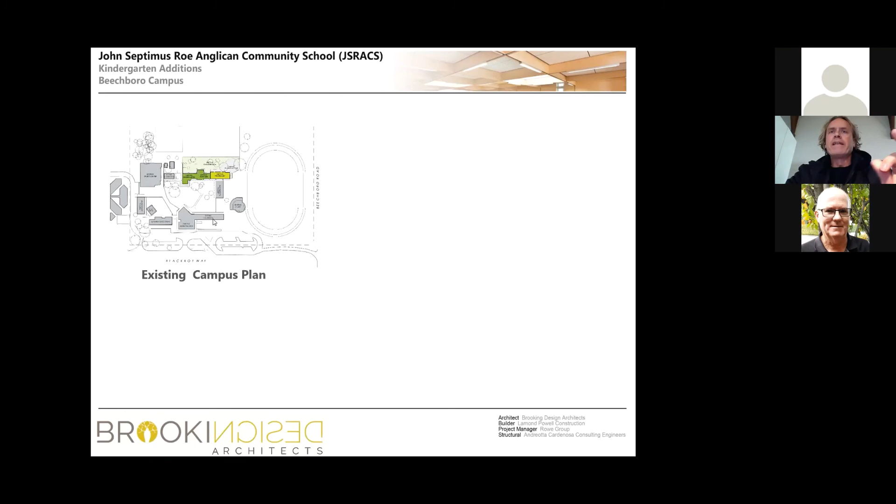as we could within that. But the overarching theme was to provide spaces that had a nurturing quality about them. So when you look at their existing spaces, you could argue quite readily that they were very uninspiring and unnurturing. So hence, looking back at it, the solution wasn't that hard to develop. So we have an existing campus. We looked at a couple of other buildings there. We did some analysis on converting them, but it just became expensive and we really couldn't get the solution out of it. So we came up with the ideal solution, which was really to build a new building,

to leave the old building stock there, which could be recycled. It made more sense to build a new building. Our budget for this project was $880,000. So that was the absolute upper limit that included basically everything. That was a budget that was given to us by the school board. So the first thought I had was, with the budget being that much restricted, how do we get a really, really simple building? The most simple building would be a square.

And we came up with an idea of encompassing these three children's spaces within one area, condensing the toilet block and the ablution area and the services to a simple core. So we ended up with a relatively square building, the core within one corner, and then this idea of an open space.

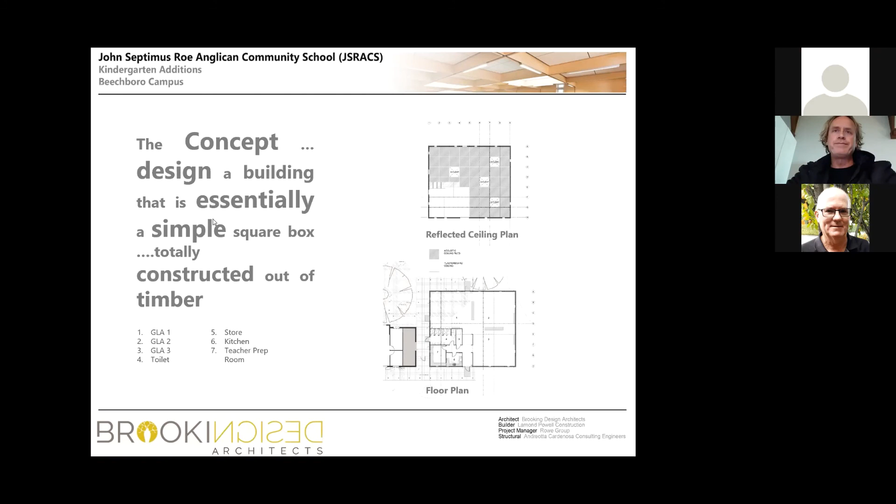Now, when we first proposed the idea of an open space for 3 kindy spaces, there was certainly some discussion about whether that was feasible with noise and noise control and all the rest of it. And then we embarked on this design development process.

So there's the spaces, and I'll just zoom in on those so everyone can get a better sense of what we're talking about. And the whole idea of this building was that it was set up on a grid. So it's set up on a 2.4 by 2.4 grid.

On those primary grid locations on the external wall, there is an LVL column, and it is then infilled essentially, gang nail roof trusses that run across in both directions, and then infilled with what I call double layer timber studding on the exterior. But the plan was extremely simple and really intended to be that way for a lot of reasons, as you'll see in the next couple of slides.

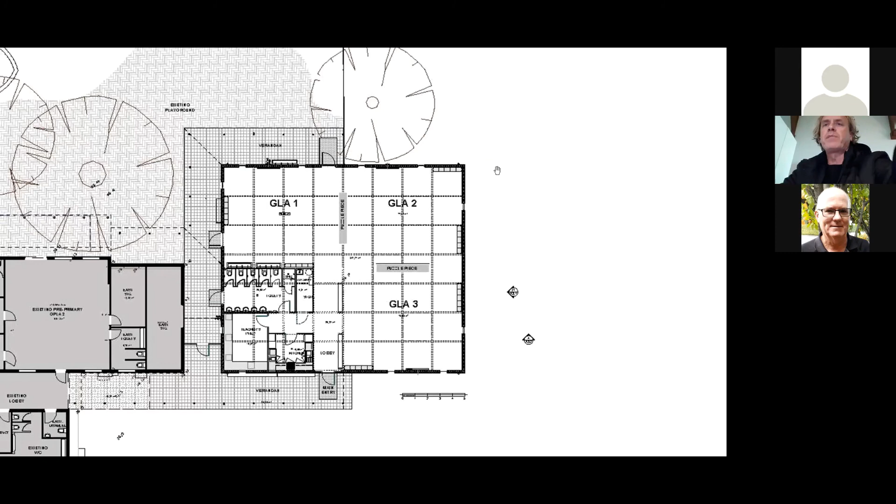So this was one of our preliminary, well, it was preliminary, it ended up being a final, but it was certainly one of our early concept drawings that we did to understand the space. And I remember literally going into the office one morning and saying to my guys, look, this thing is just not working. We had gang nail roof trusses, we had ceilings below. We were looking at this thing of gang nail roof truss being something that you would hide and it would disappear.

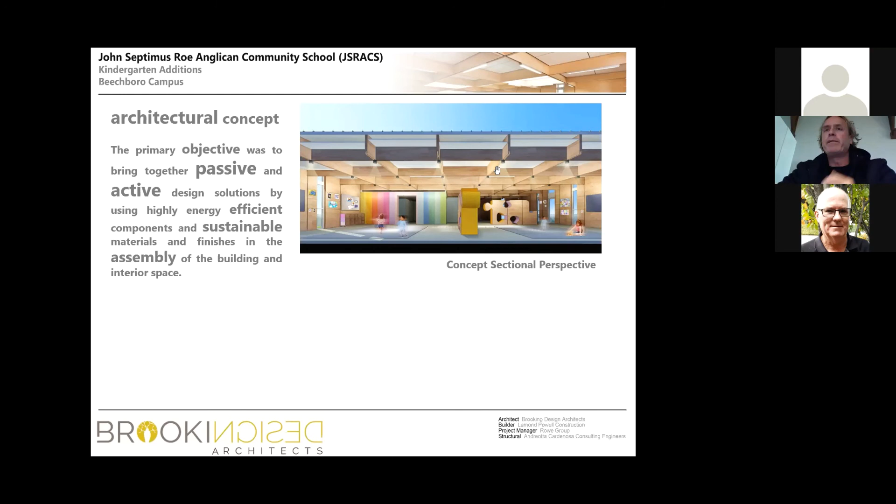And what happened was that we were literally putting ceilings through at 2.4 metres. And again, the space was uninspiring. We were using timber in a very conventional way. So I came in one morning and said, look, this is not working, but I've just got this idea. So I said to one of the guys in the office, just quickly model this and put material on the faces of these gang nails and see what happens to the space. And that became the catalyst for this design.

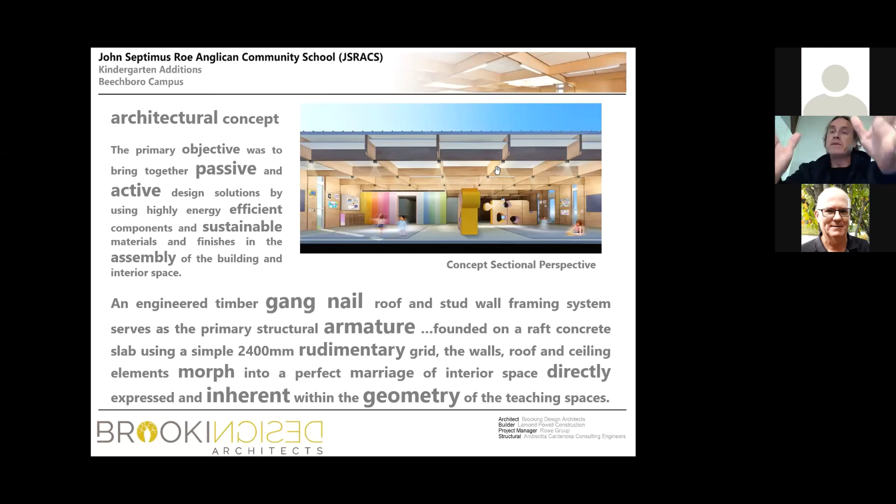So we ended up using these gang nail roof trusses, which were extremely economical. But the building system was really just a raft slab, series of LVL columns supporting the gang nails, and then everything was clad in ply. And the way we'd set up the grid, the idea was that we would not have to trim the plywood sheets. So the plywood sheets would come in at 2.4 by 1.2, and they would be delivered to site, and then everything would fit together as a jigsaw puzzle.

One of the unexpected things that came out of it is this little blank of colour in the background. A lot of the buildings I'd seen prior to this used primary colours. You go to a kindergarten and they'd put red everywhere and primary blues, just as a token sense of putting colour in. But we wanted to really restrain the use of colour so that it became almost like a peel away, like when you peel away an orange and you have a reveal to it. So we put this spectrum of colours against the wall, which was quite clever because we ended up winning the National Dulux Award for just that wall, which is literally only 6 metres long.

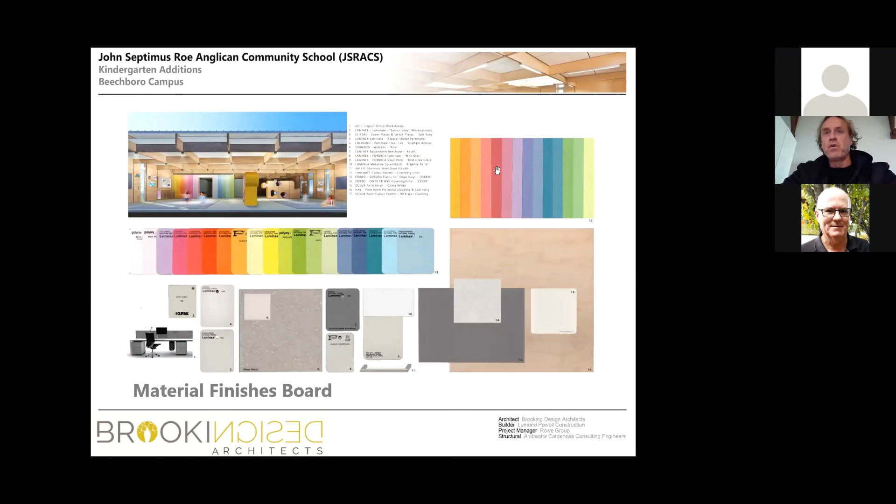So then I came up with this idea of puzzles and how could we incorporate this idea of a puzzle within the shape and things. And we started testing some of the ideas around furniture. So furniture to us, or storage elements within the space, should be flexible. There shouldn't be anything within a classroom which is rigid and fixed, because spaces evolve and you really want to give the teachers and the students the opportunity to reconfigure spaces as they wish.

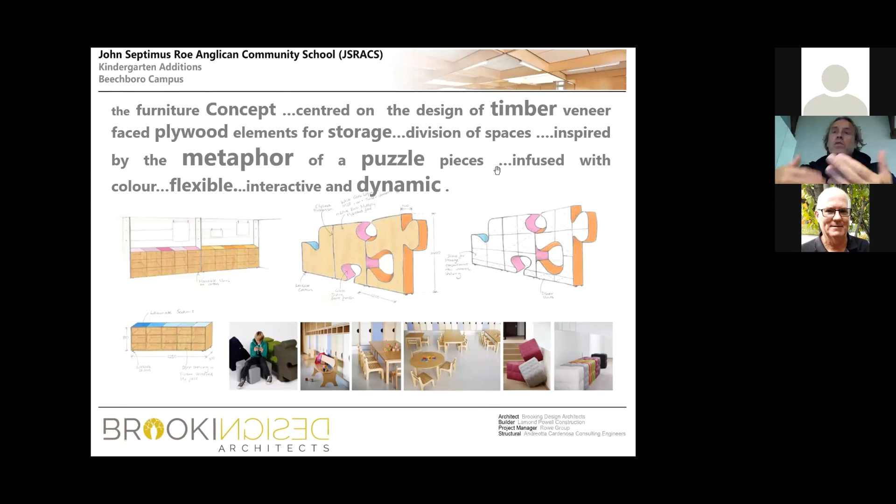So what we did was we came up with these quite unique storage elements that then became dividers, which also by default became play spaces for the children as well.

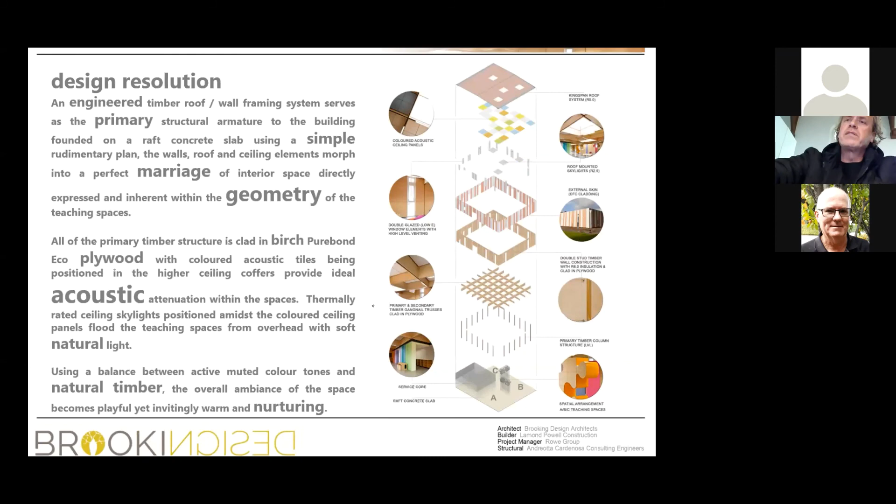Okay, so this is my go-to kind of sketch, I suppose, because it sort of reveals the simplicity of what really this building is about. And I'll try and zoom in a little bit so everyone can kind of see it. So we literally just have a raft slab, 100mm raft slab that sits on the ground.

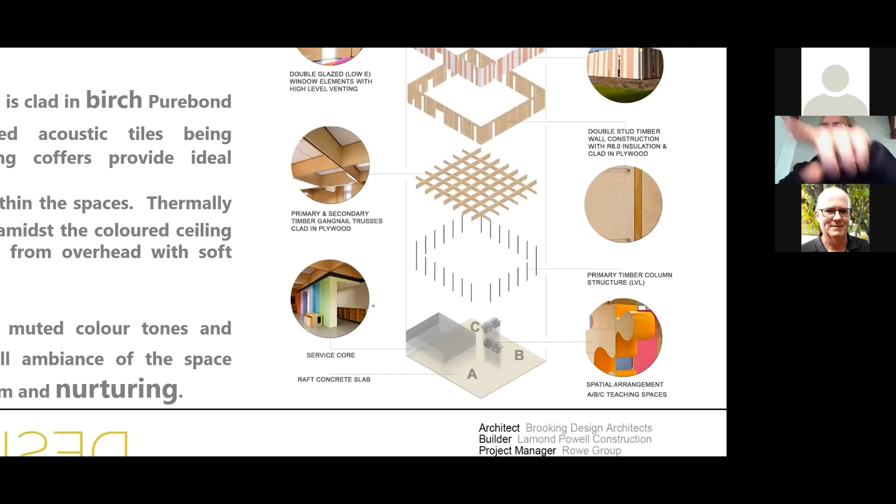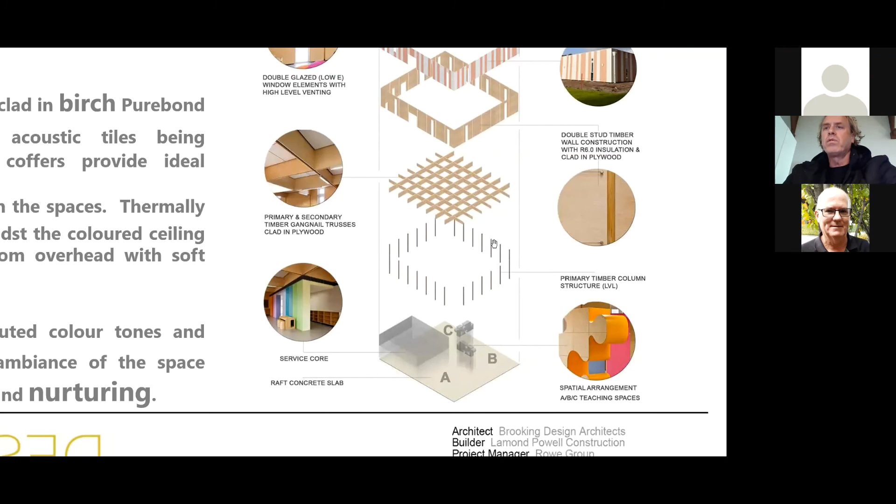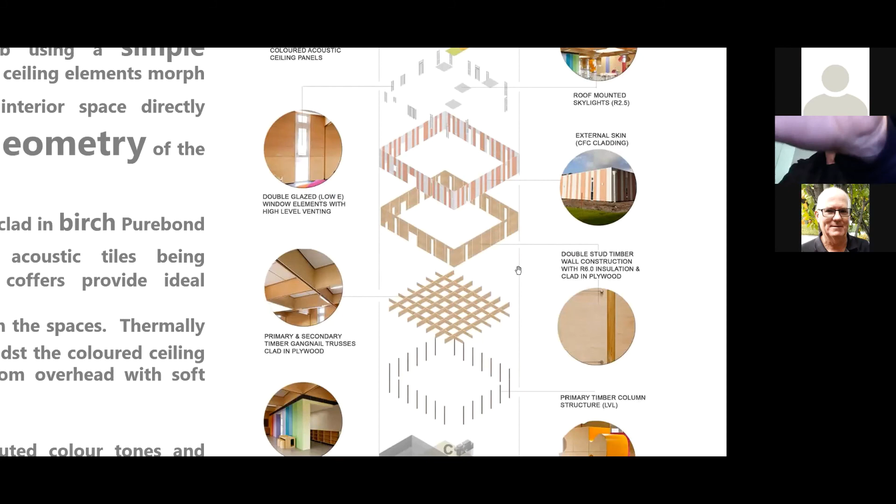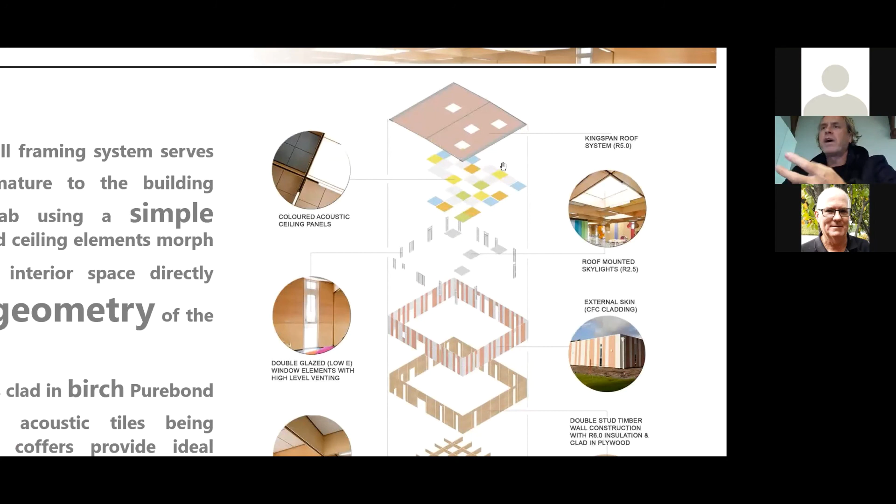In one corner, you can see there is a service core, a series of primary timber LVL columns that sit in the wall surfaces all the way through. The trusses that sit in two directions, a primary direction and then sort of secondary ones infilling. Timber framework, which I'll talk about in a second, cladding on the outside, some very restrictive glazing, which was double glazing. And then this idea of these ceiling panels that acoustically attenuate the space.

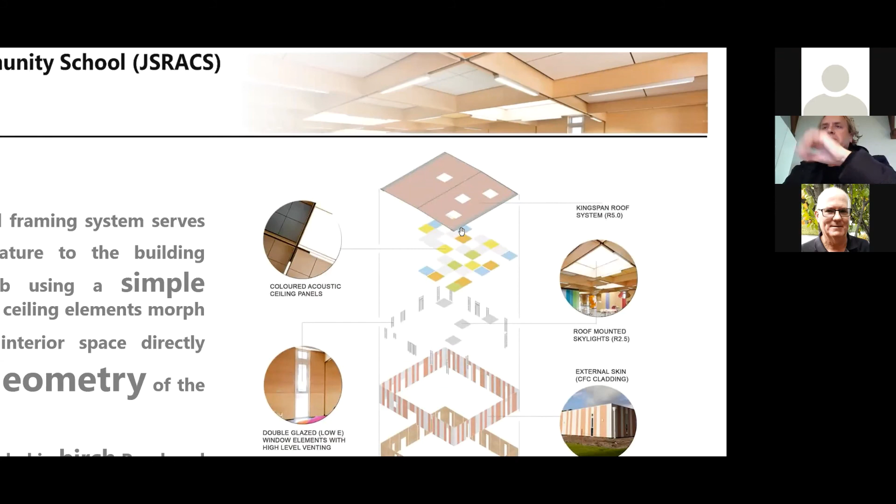And my kind of go-to roofing material, which was a Kingspan product, which has got an amazing R value, and you can create sort of an airtight type ceiling of the building. Skylights at high level. So one of the things you'll see in some of these images I show you is that there's this beautiful sense of natural light that permeates the space.

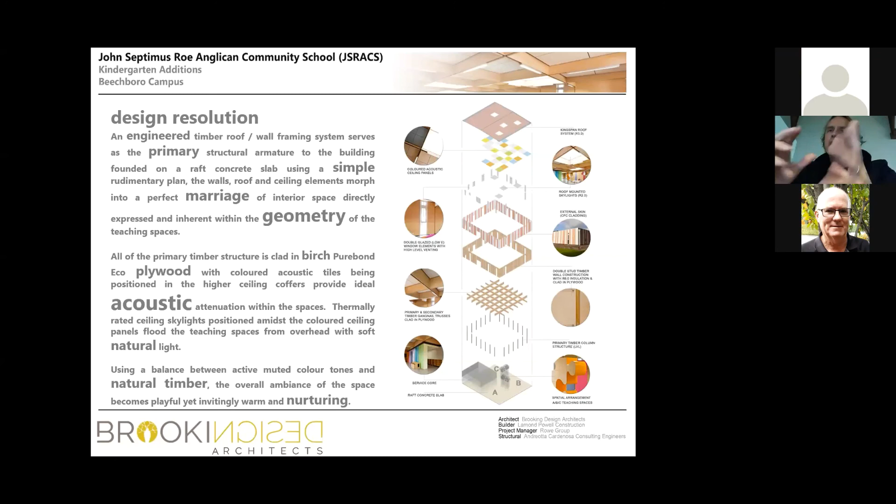So quite intentionally, we've used narrow, small windows which go full height from ground to first floor level within this space. The idea being that children of 3 and 4 years of age aren't that big. So it is relative to their scale, and they get views in and outside of the building.

And in this building here, there is one single, I think it's 100 by 100 RHS that sits in the centre of the space. It picks up the longest axis of the gang-nail trusses. Those trusses in that direction, I think, are going 18 metres, so it picks up a 9 metre span in that centre part. Timber bracing applied to the external skin.

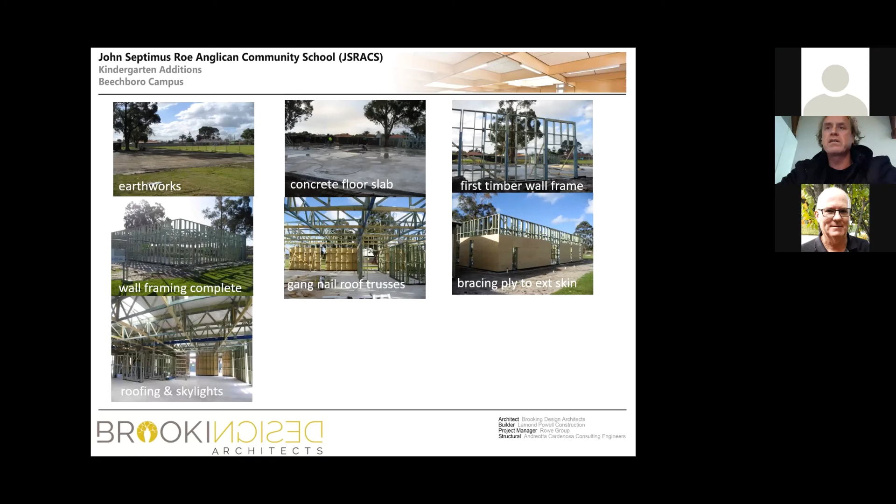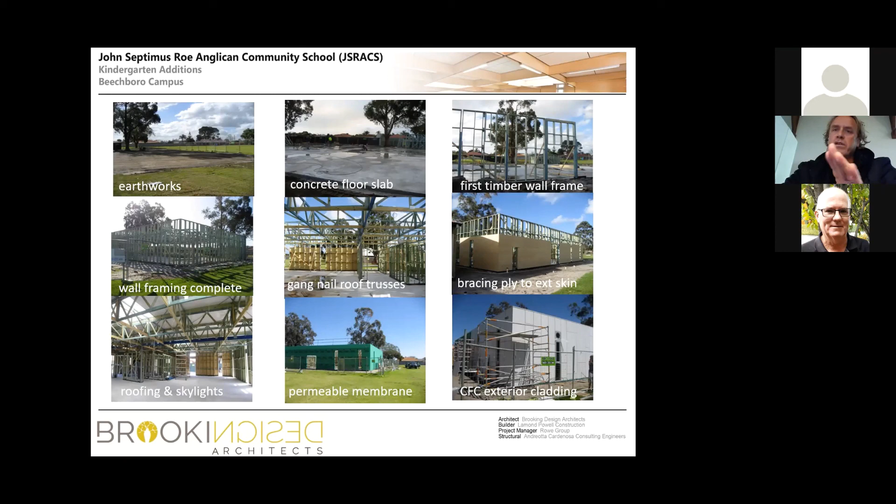Skylights and roofing, as you can see, with the Kingspan product and those skylights going in. Membrane wrapped on the outside. And then the CFC exterior cladding being applied to the external face. And parallel to that, once we'd got roofing and skylights installed, ceilings, fixed cabinetry, the plywood lining. There was a fair bit of work, I'd have to say, in the application of that plywood lining, because there's quite a few square metres of it.

And again, the magic of doing a building like this is you're restricting the number of trades that you have. So whilst we had bathrooms, and there was some tiling in the bathrooms, certainly, primarily this building is a raft slab. Yes, it's a wet work. Everything else from framing, roofing, plywood linings is really all a carpentry trade.

So we had some exceptional carpenters that we pushed to a joinery level of finish as well. So what we were after was this crafting and junctions of materials that require precision, and certainly we did have some amazing trades on this. Coloured wall panels were installed. There's a shot of the off-site cabinetry, so you can start to see that puzzle idea coming into fruition, and then external painting.

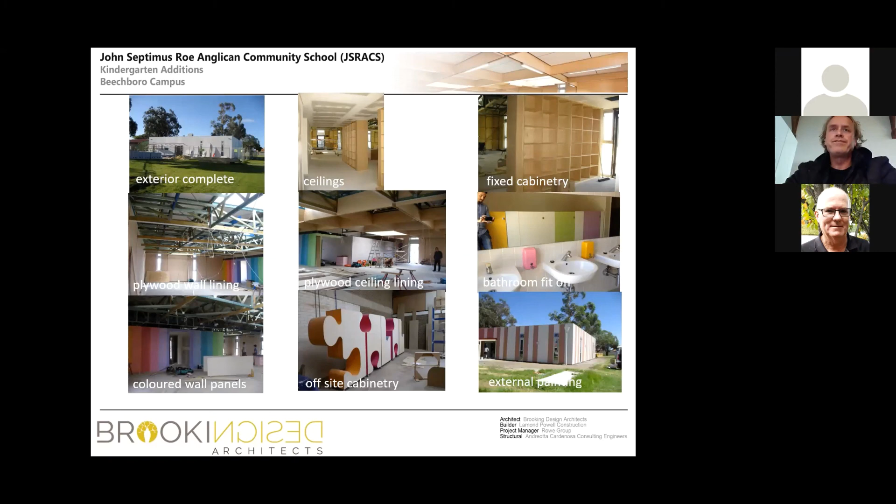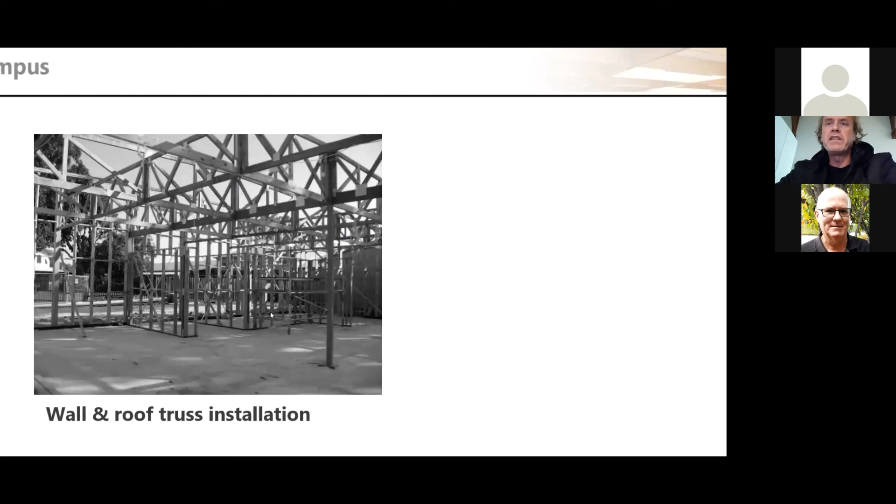And then just a little bit of detail. So I wanted to give everyone a little bit of detail about, I guess, the really important and unique elements of this build, although using a really quite simple system. But you'll see there right in the centre, this was that steel column I was talking about. So that is the only steel column and the only piece of steel in this whole building.

And just flicking through, obviously the truss connection detail, using plates. What's probably not shown in here is we did go through afterwards. So they assembled this generally with nail guns and these gang nail plates, and then we did reinforce some of the primary truss connections using steel plates and bolts. Because you can see, this would have been one of my defect shots, and you can see in there the gap between those two trusses there.

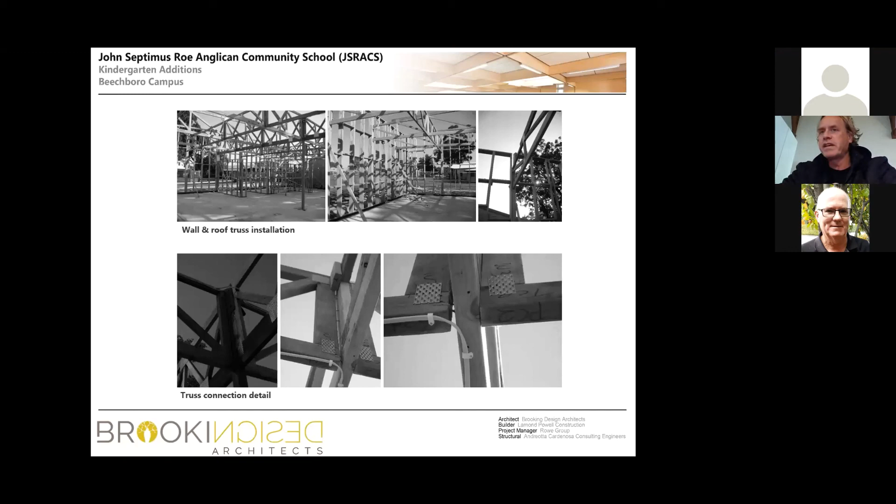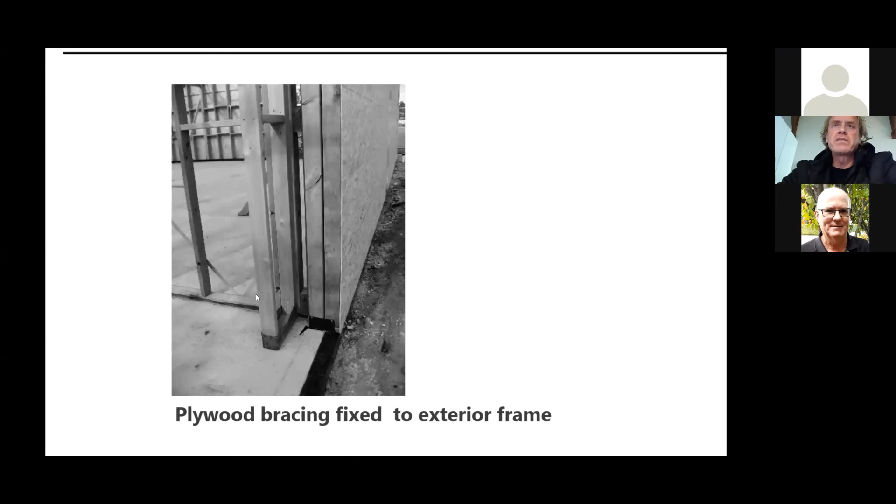Okay, this area here is a really important kind of space, because you can see this double stud wall that I'm talking about. So within the LVL, I think was a 190, and then what we had was two 90mm studs with a 10mm gap in them.

Now, this was done for a number of reasons. One was to increase the wall thickness to enable us to put in a couple of layers of insulation. The other one was that, and I said to the guys in my office, we would be absolutely crucified if this building felt hollow or had a sense of sound transmission from the inside to the outside as well.

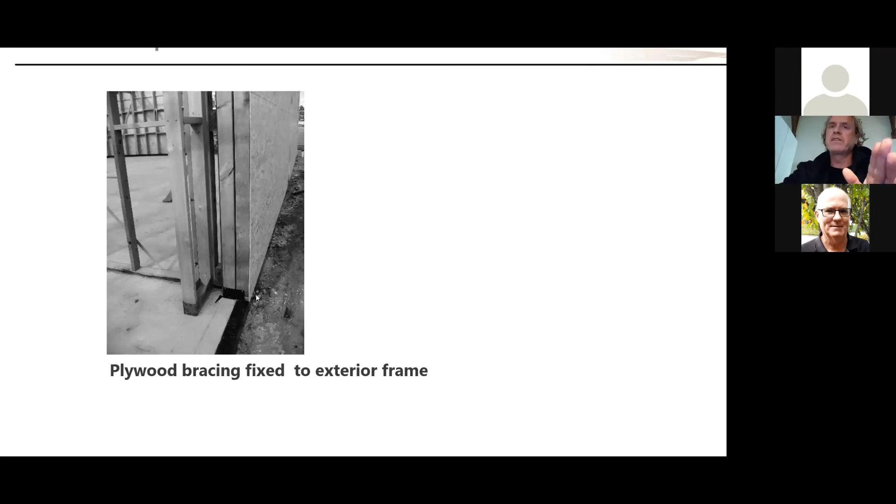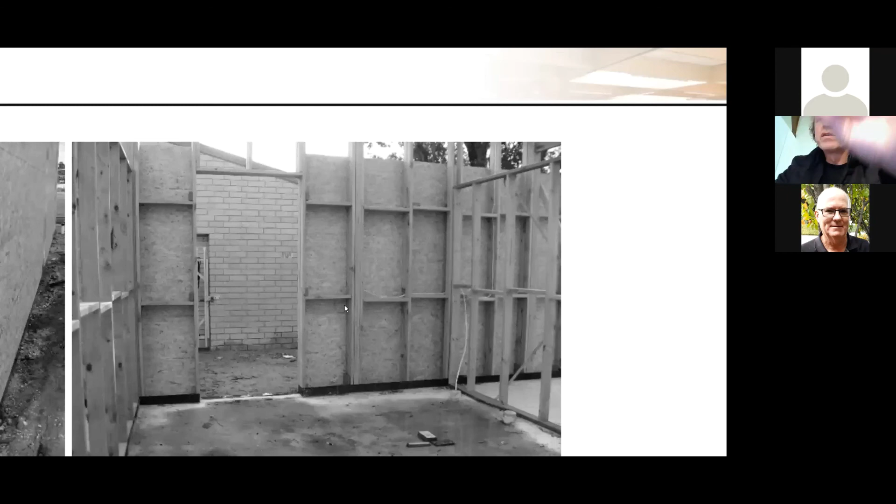So what we did was we detailed everything to be double stud all the way through, and to create this disconnect, we had two layers of 90mm with a 10mm gap. You can see in this shot here, and I'll zoom in again, the idea of this double studding, and you can see right in the centre of that area there, that was on the 2.4 grid, and the LVLs going in place.

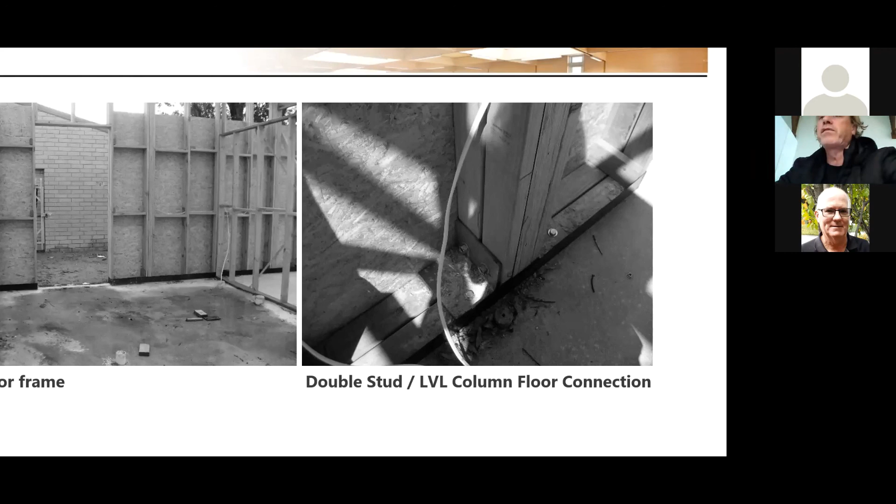Floor connections, so to tie down this whole building, you can see in this shot here the LVL going to the ground, the double studding, and then an angle bracket fixing straight into the concrete floor, and then bolting through that element to tie the building down. Again, really simple, easy to do fixes, nothing required to be cast in, just really quite conventional. And again, all of these things translated to this benefit of cost.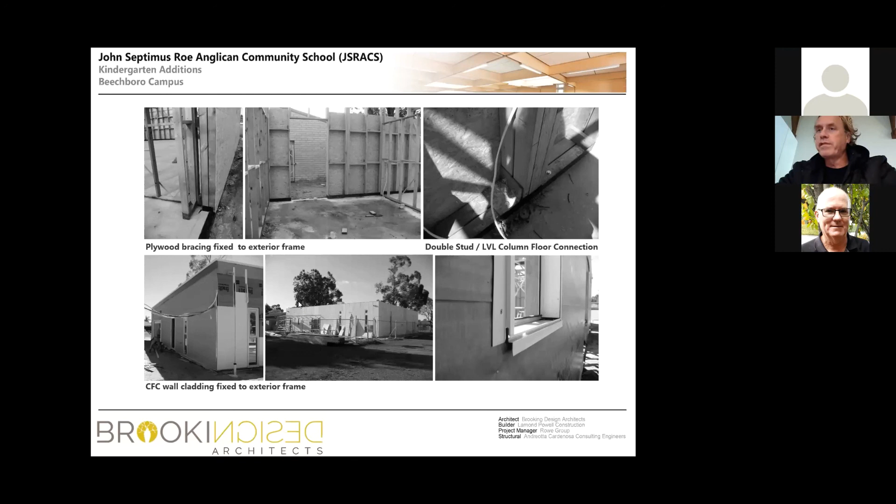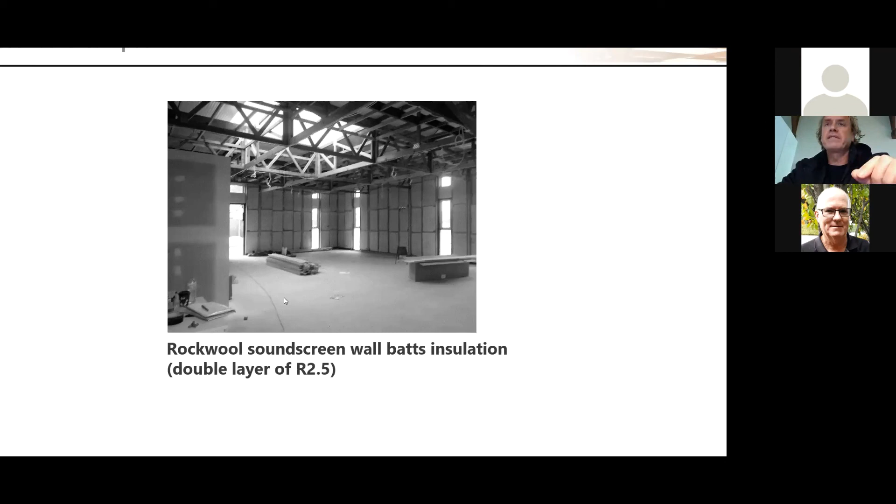Just window flashings, obviously a really important type of detail. Here you can see the installation and the wall batt installation coming in. So we were using two layers of R2.5 in this. In the roof product, in the Kingspan product, we got an R5 as well. And using double glazing, we ended up with this really totally airtight space.

And I was, I suppose not adamant, but pretty forceful about the notion of this building being airtight, and it was certainly detailed that way. And one of my jobs on site was really to critique the builders' work in that, to make sure that these areas and these junctions were airtight, and we could achieve what we were trying to do with this building.

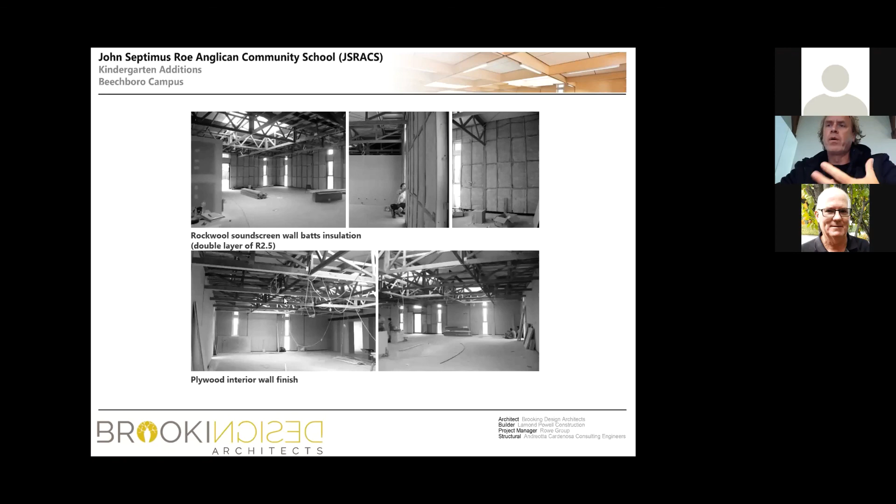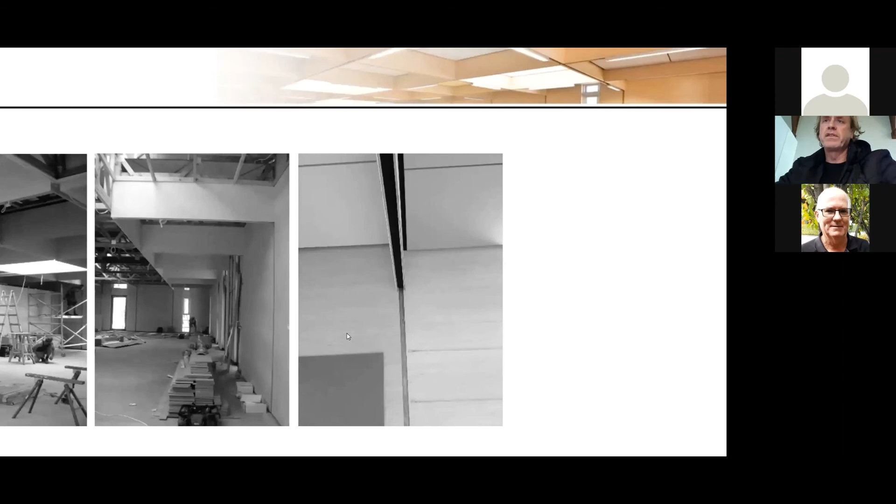Plywood cladding to the trusses. This is a junction of those trusses. So in the centre of those, we've infilled that with a little bit of timber to create this negative detail. It probably shows up better in the later slide. Cabinets turn up, and we are here on site.

So this is a shot from the oval side, and we're just using standard 9mm CFC on the outside of this building. Again, with not a lot of money to spend, we were just looking at where do you spend the money and how do you create a magic about it. So this is just as you walk into the space, just off the entrance lobby, these pigeonhole units, again utilising plywood, exactly the same material to create storage areas.

This is one of my favourite shots, which is a view straight up to the ceiling. So when we took these photos, I said to the photographer, "Can I borrow a camera? I just need to lie down on the floor." And I laid on the floor and I said, "Oh, there's this great shot on the ceiling." And she's like, "What do you mean by that?" She says, "Look, just take the camera, take the shot." So I ended up doing that.

And you can see here that the area on the right-hand side is actually one of the skylights that runs through. And then you see these acoustic panels. Now, again, everything was pre-designed. So these panels sit exactly within this 2.4 grid. They're secret fixed. And what they do is they provide this attenuation at high level.

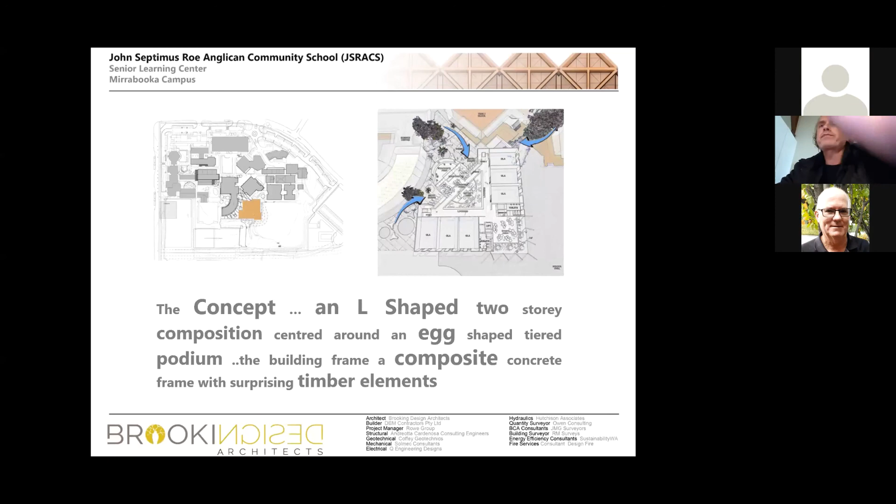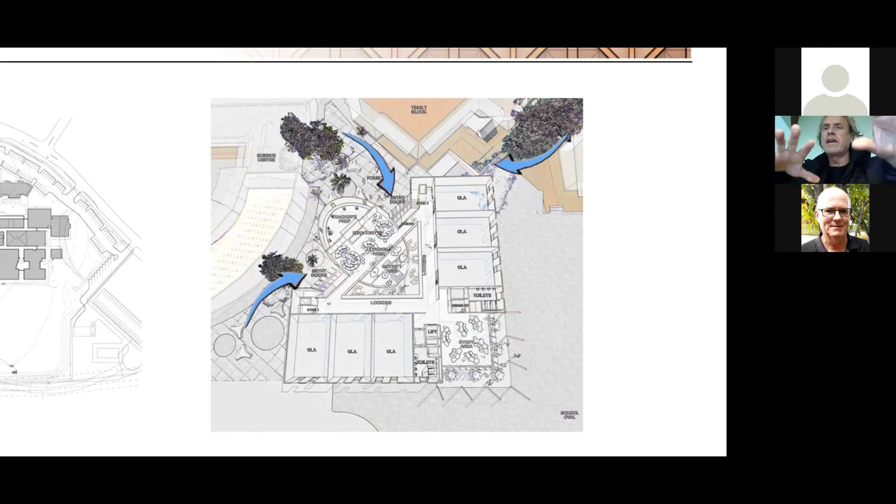So what we had was a really very simple plan. Again, I love simple plans. An L-shaped building, the idea of creating an auditorium in this central space, and I call it the inverted egg. I must have just done a circle on a bit of paper, and then all of a sudden it just turned into an egg. And to create different spaces that students could go into for learning, so different study areas across the whole building. But again, a very simple plan.

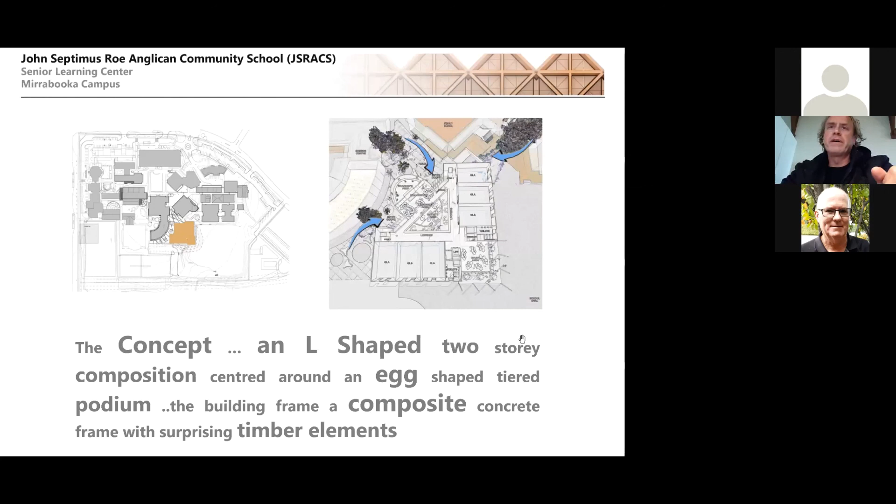And the logic behind the simple plan is really to try and control cost. I mean, this building is many millions of dollars by default because of its floor area, so we need to control cost in a simple way. So you can see in here, this is a view of the ground floor, but the first floor is absolutely identical to this.

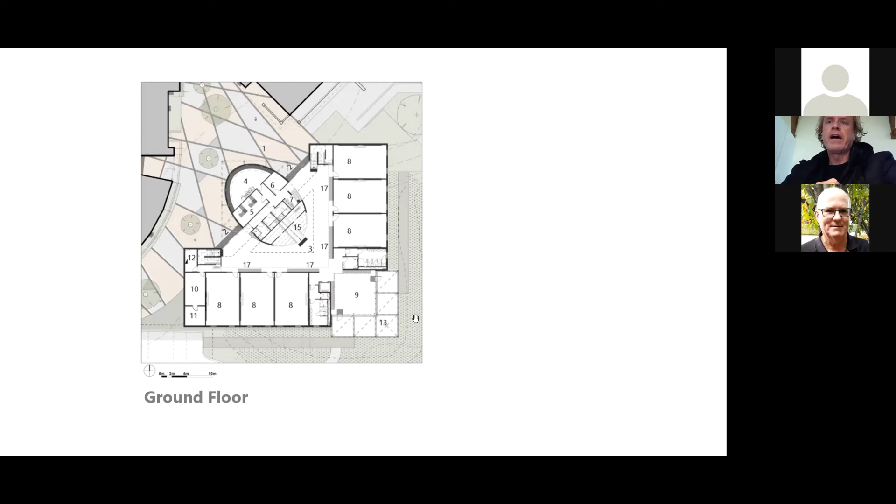So we have an entrance lobby at position number 2, a couple of stairs to the first floor, and this central auditorium. Where we've got labelled number 15, that's this big tiered auditorium area that we had an idea for. All of the different teaching spaces, and then number 9 is a study space that opens up onto the oval on the outside. First floor level pretty well repeats itself.

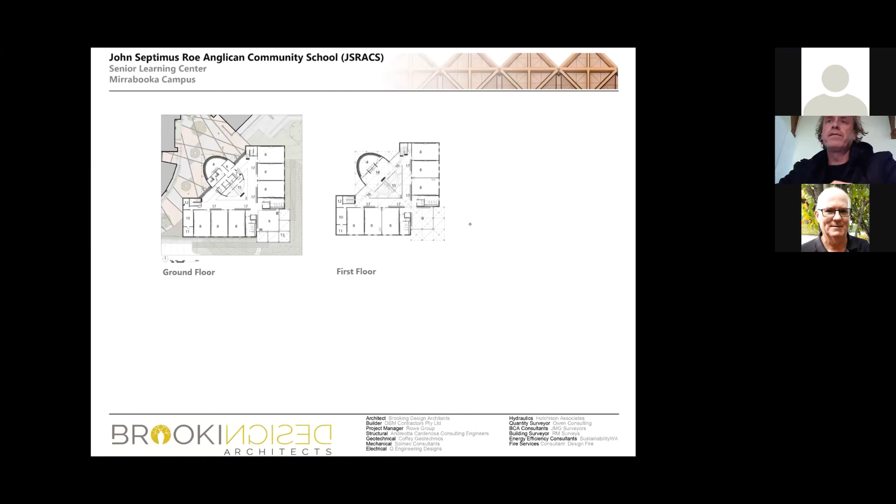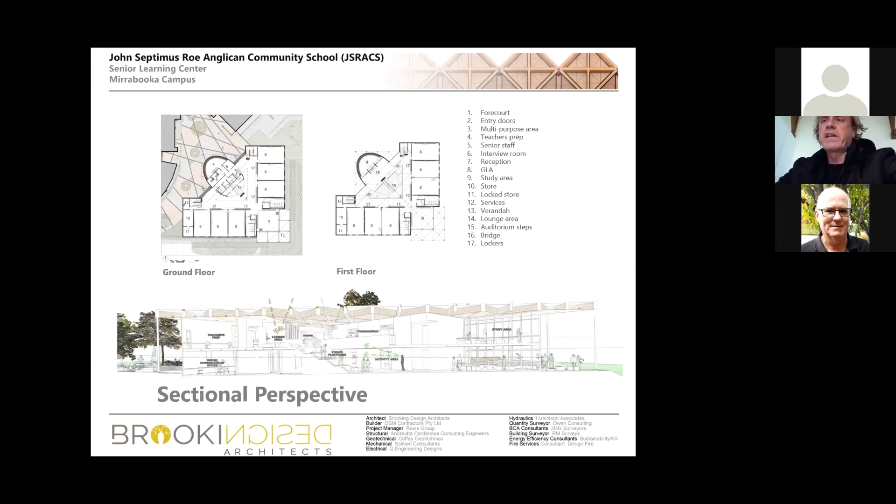And our biggest opportunity for the use of timber in this particular project was really across this main auditorium area. You can see it dotted in the background here, these crisscrosses that run through. This cross section kind of gives away the story: we wanted to do this whole roof in timber framing. So we ended up using pretty big LVLs, I think 600 or 700 mil deep, for the big, massive spans here. We're talking 18-metre spans.

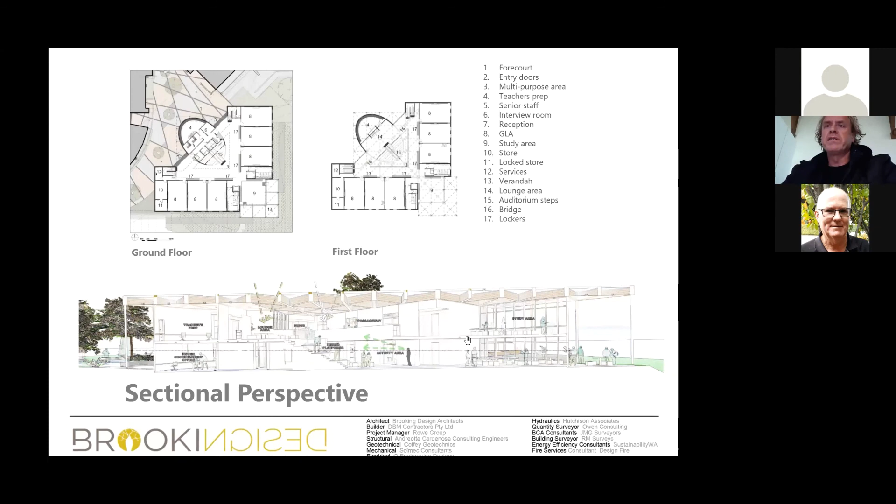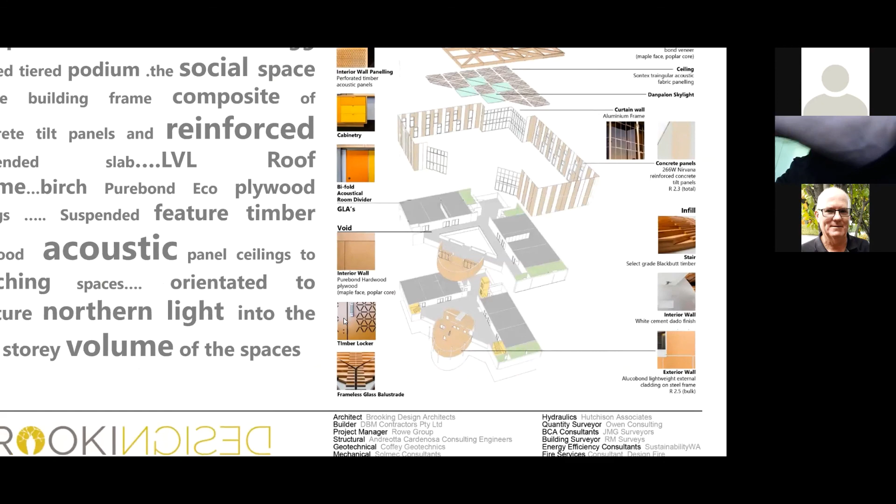I think we ended up with one single UB beam that runs through the centre of the mid-span of this plan. And you can see again the ideas from the kindergarten building flowing into this one as well, although when you see the architecture, you'll see that it's very, very different. Okay, the cross-sectional plan. So you can see here 2 levels.

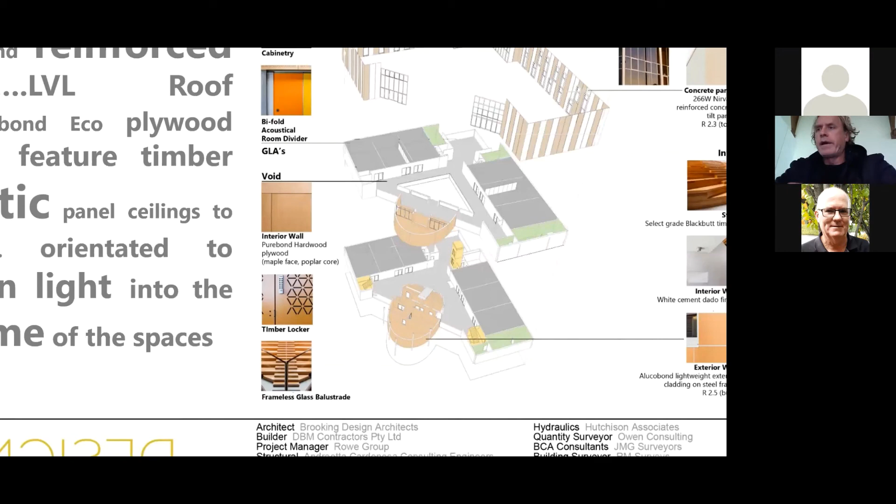The primary construction system for the walls is actually concrete tilt panels, but they are insulated tilt panels. We used a Nirvana system, and we were able to get a really good R value out of these, which is conventionally not the case. Normally, if you're using tilt panels, you start putting all the internal linings in them. We wanted to leave the raw concrete tilt panels exposed internally, so this is using a Nirvana system.

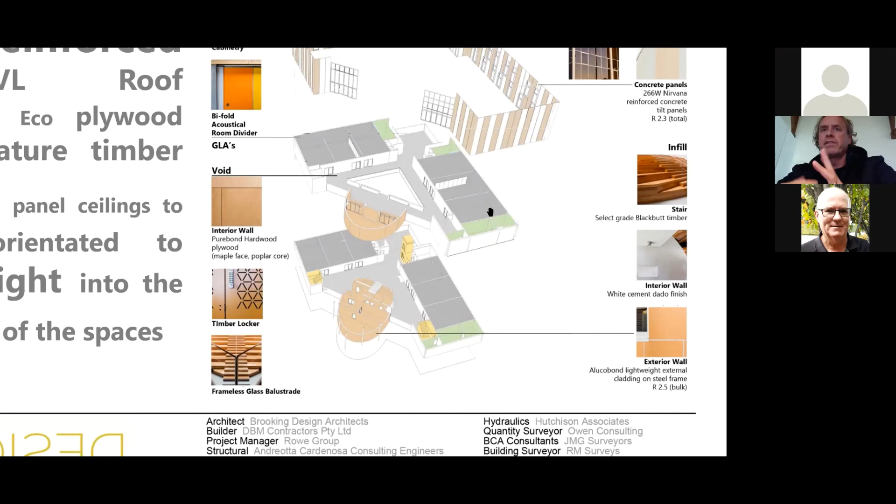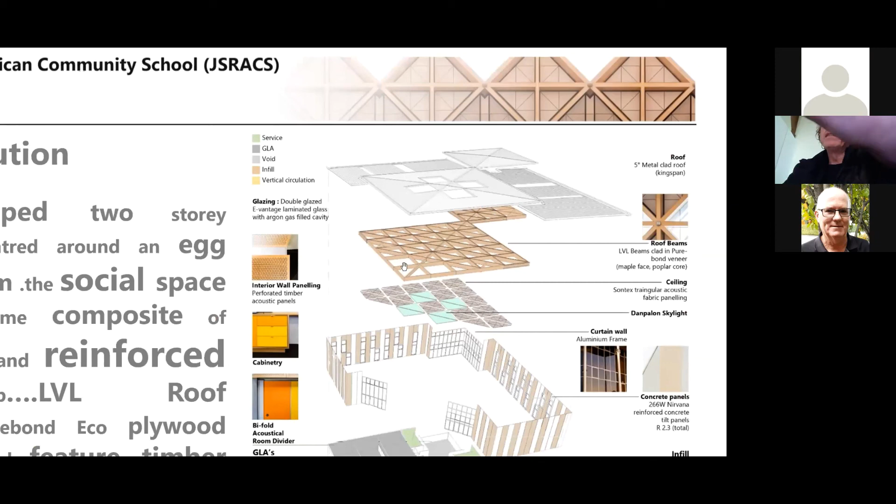So it's basically a concrete pour of about 50 mil, 60 mil of insulation, and then a topping slab on the outside. So they become quite wide, but thermally they produce great R value. And you can see again at the top the series of LVLs running all the way through, and this acoustic ceiling. Then we've done some really special things in some of the teaching spaces, which we'll see. Let's see, I'm going for time.

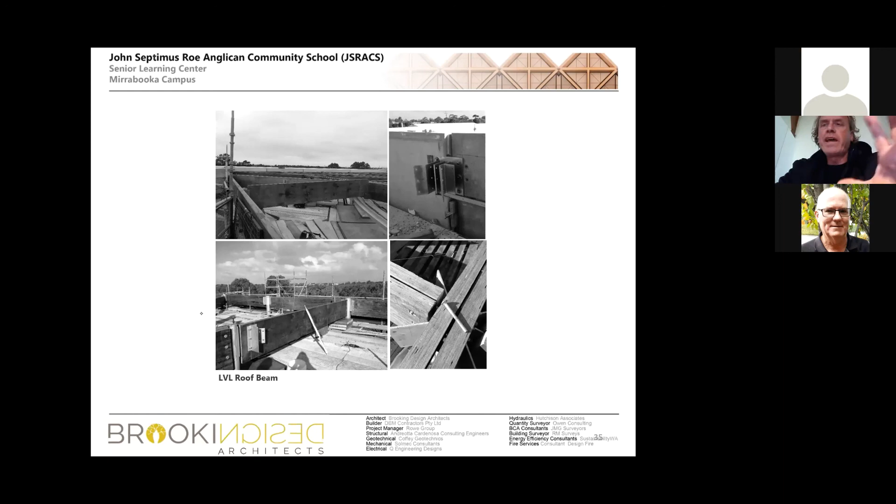Sort of standard connectors. So this is sort of the roof going on at high level. And we doubled up on a lot of these just because of the sheer span and rigidity that was needed at this upper level. This is a view to the ceiling in the main auditorium space just starting to take shape.

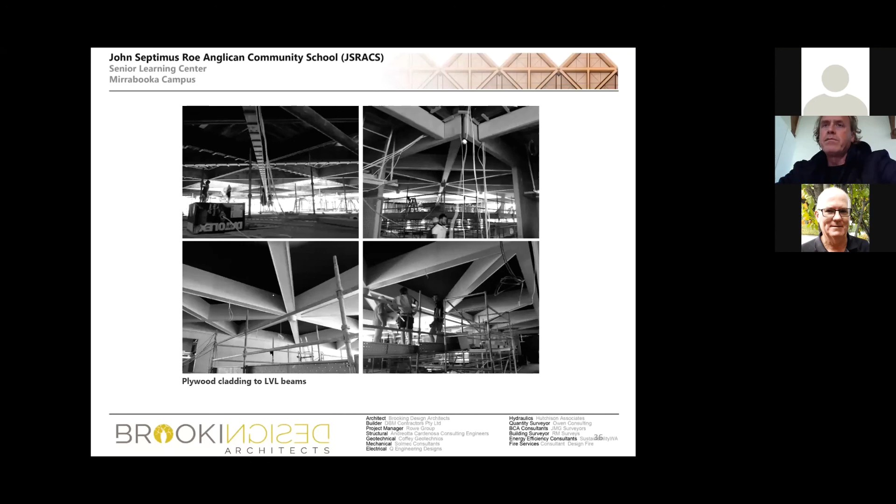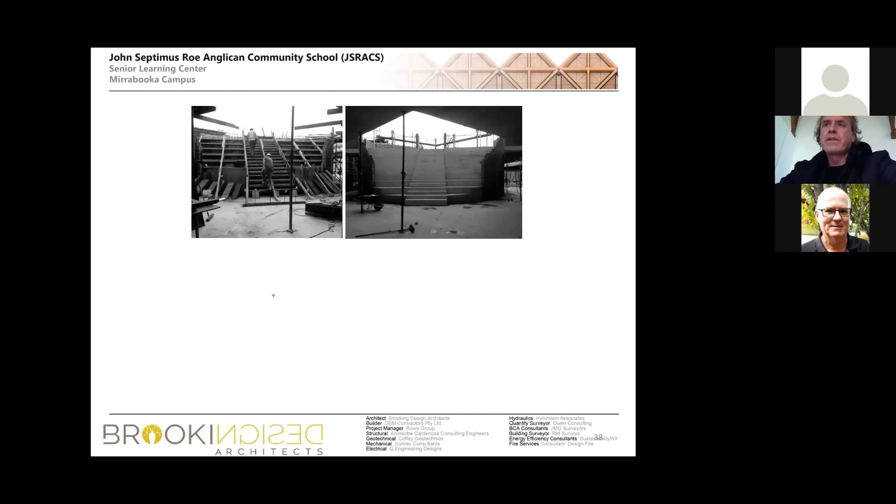Plywood cladding. These guys, the joinery guys, were really, really good. Again, acoustic tiles and skylights coming in. That central auditorium I spoke about, starting to take shape. Using timber lining boards in teacher spaces. I'll talk about this in a second, which is our acoustic timber ceiling to the teaching spaces.

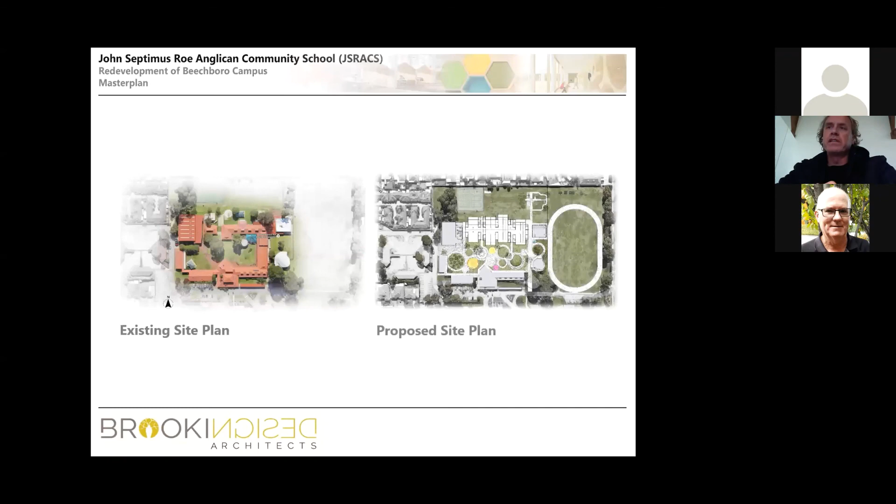So the last thing I'll talk about, and I've probably got 3 minutes to quickly go through this one, is we were asked a couple of years ago, this project's actually on hold, but it's a worthy project of looking at. This is the Beechboro Campus where we had designed the kindergarten building, and we were asked to master plan and get rid of all these horrible buildings that I showed you earlier. So we proposed the demolition of a series of buildings and the grouping and housing of new teaching spaces.

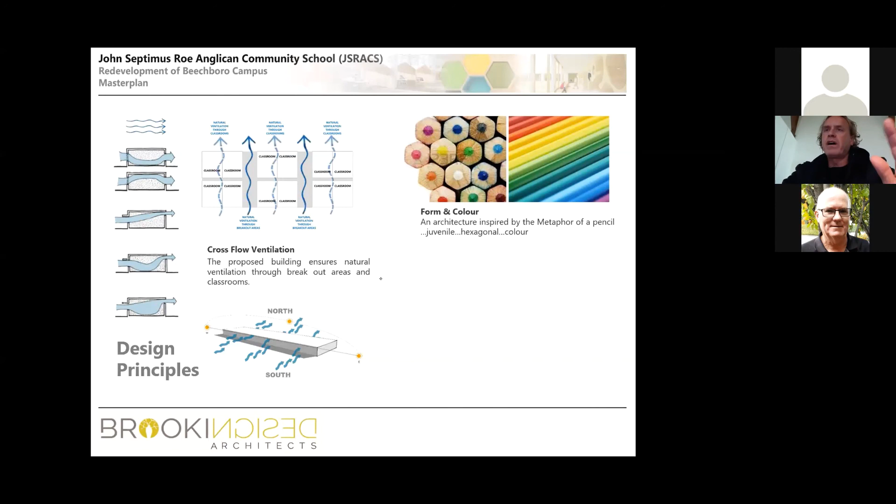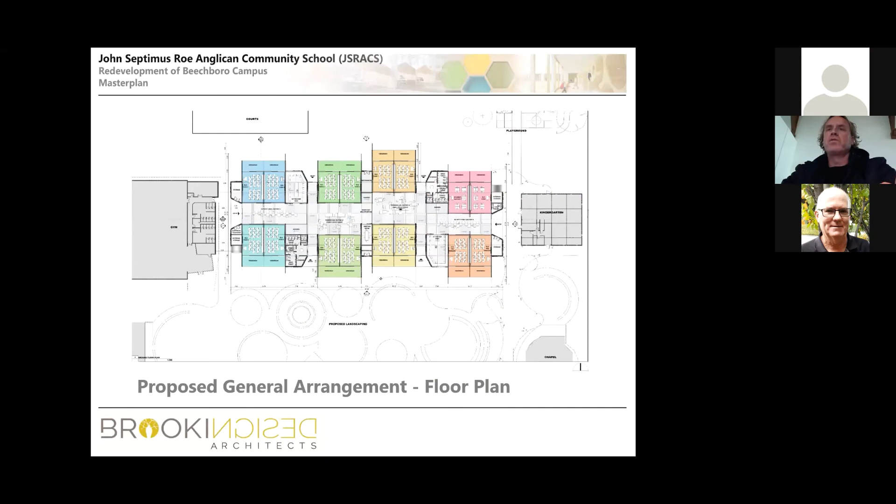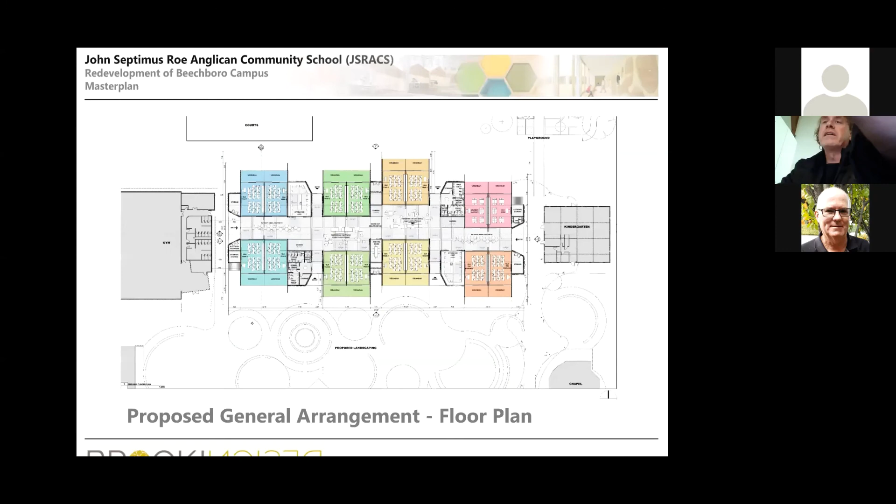Oops. I'll go back. So we looked at the key core design principles of cross-flow ventilation, what this architecture would be, and we were inspired by the idea of colour pencils, and then connection, within the building and within the campus linkages. So this is a proposal for a single-storey set of teaching spaces, utilising these internal areas as breakout teaching spaces and hanging spaces. And all of these areas open up onto the outside. Every classroom has a veranda. And again, this is a 100% timber frame building.

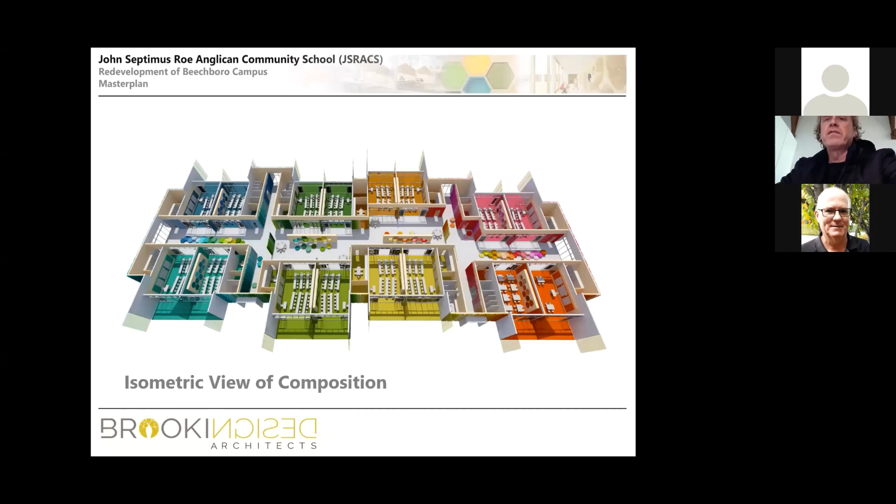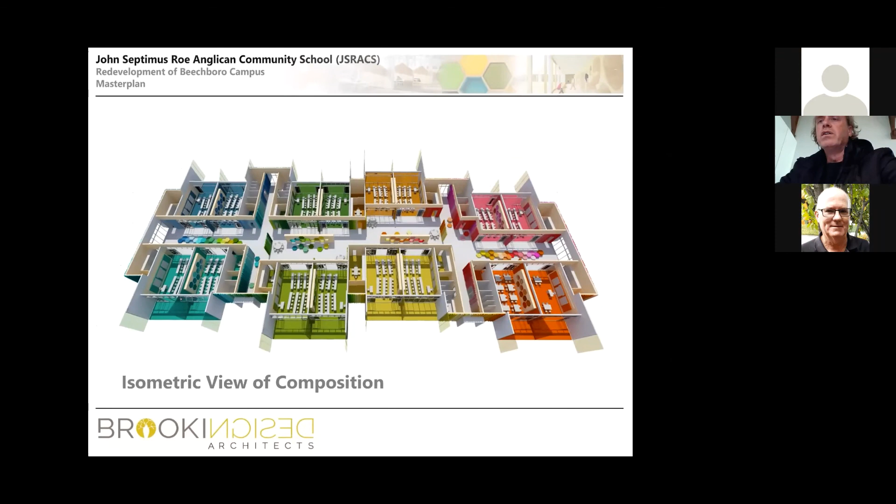This view probably gives you an insight into the logic and the planning of it. And then the use of timber within the spaces. So we're colour coding different areas with possible vinyl floor colours and things, using timber as this, sorry, I keep jumping around everywhere.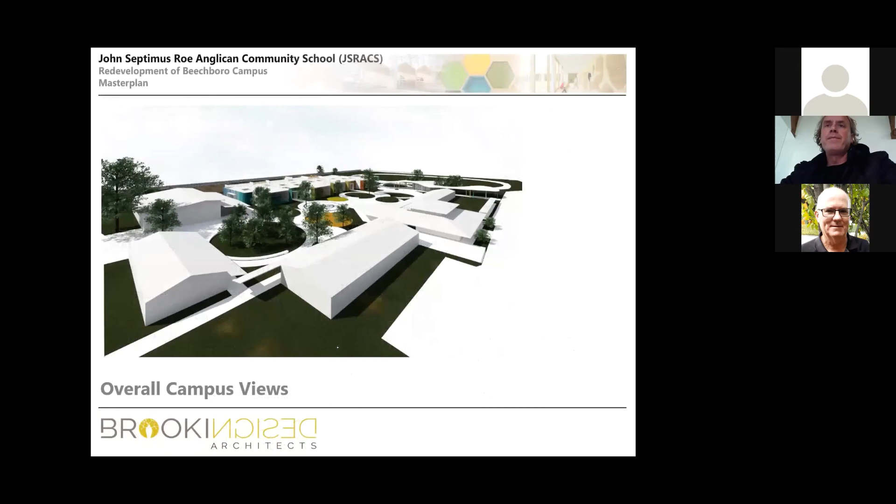The building system itself, very, very similar, different kind of emphasis and certainly a different flow within the space. Some overall views of the campus. Using colour pretty strongly within the external cladding. Some of the internal spaces or concepts for the internal spaces, playing around with coloured timber. These are views from the sort of breakout and activity areas.

I think just because of time, I will wrap it up there. I always acknowledge, when we do these sorts of buildings, that there has to be a really good client, right? So Matthew Hughes was the principal of this school for a number of years. He's now a member of Parliament, believe it or not. He's moved on, but without his support and his support of our vision, none of these projects would have been possible. So I always credit Matthew with his great support of our practice. So what I'll do now is I will just stop sharing and hand over to Greg.

Tom, thanks very much. That was excellent. And just seeing some of the chat comments coming back, just about the simplicity of the buildings, particularly with the kindergarten project, just how straightforward it was, using straightforward structural materials, to create such an open plan building. So it was great. Thank you, mate. So we'll have a look at some of the questions.